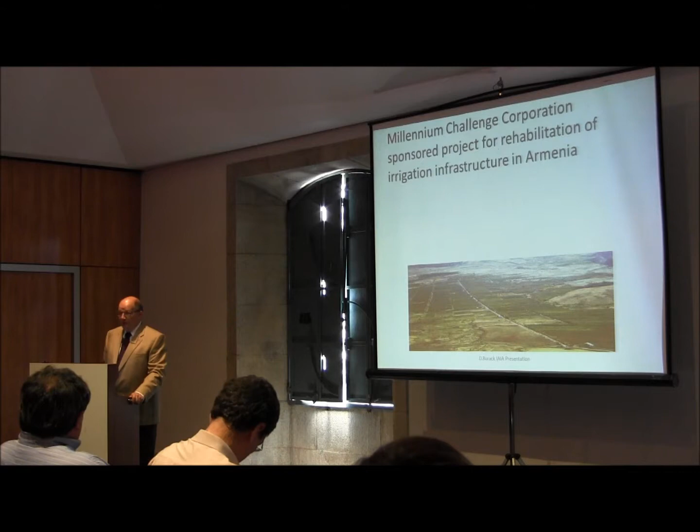It was the recipient of a grant from Millennium Challenge Corporation, a compact of 5 years, to rehabilitate Soviet-era irrigation infrastructure throughout the country. It was $177 million construction cost for the total project. I won't give you the statistics, but there were hundreds of kilometers of canals, main canals, tertiary canals, gravity systems, also rehabilitation of 17 pumping stations.

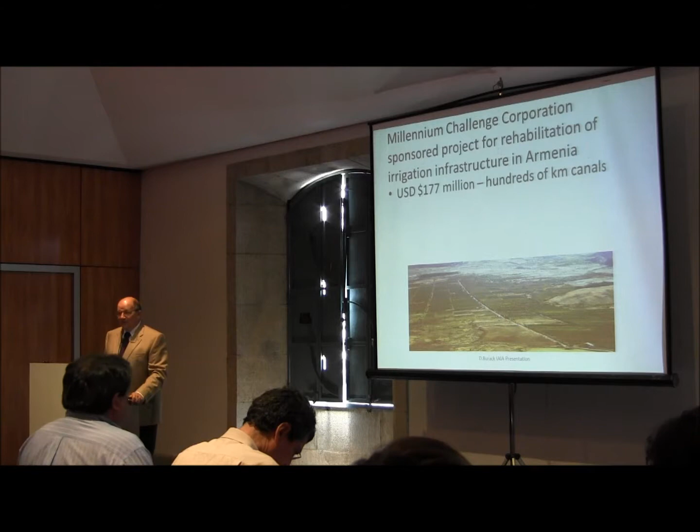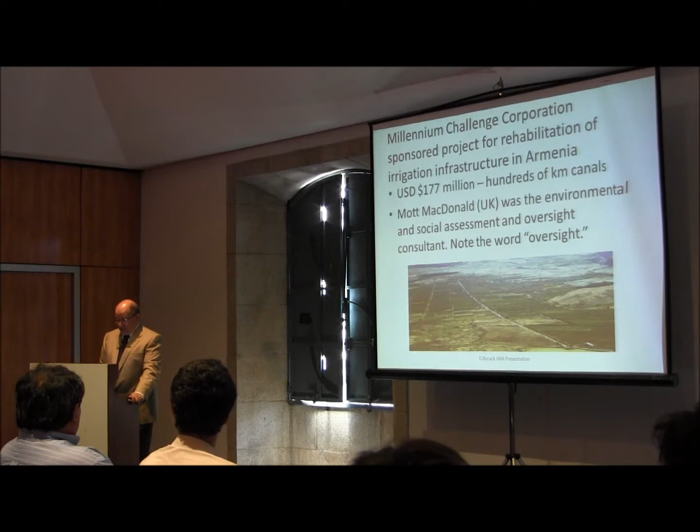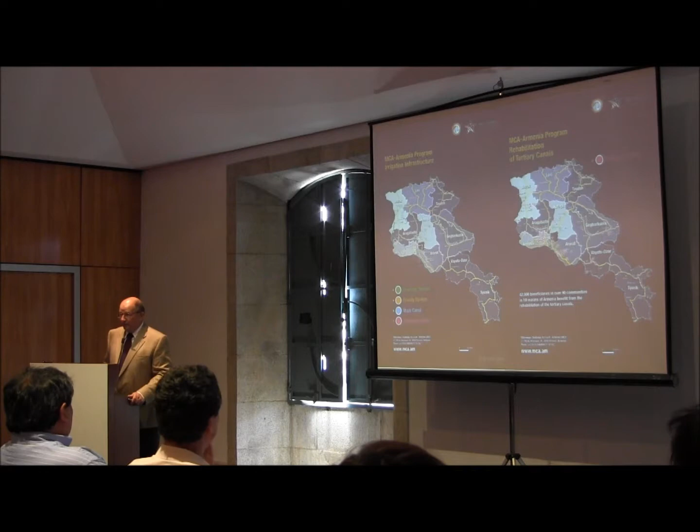I also won't go into all the detail on the systems, but you can see the little colored items show where the locations of one or another of many sub-projects, which was one of the challenges for the project.

And finally, this topic of compliance monitoring or oversight, as it's termed in this particular project. The project was conducted under MCC Millennium Challenge Corporation standards, which are adapted from World Bank and ADB and other international and multilateral development bank standards. This is, hope I can use your laser pointer here.

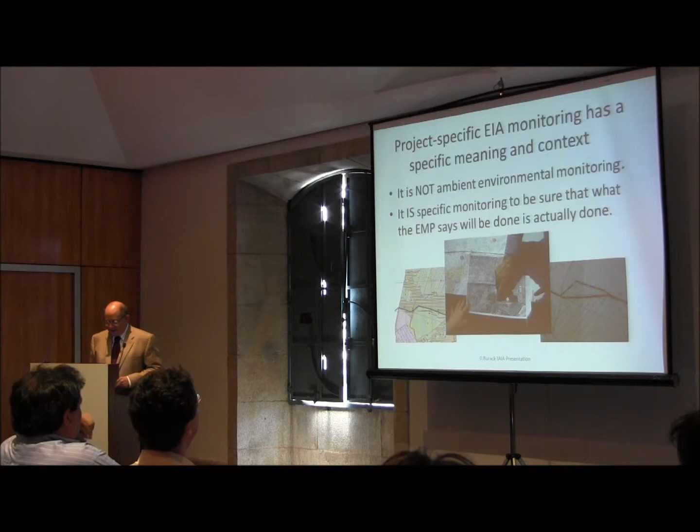Again, I already said this, that this is a specific context. It is specific monitoring to be sure that what the EMP says will be done is actually done.

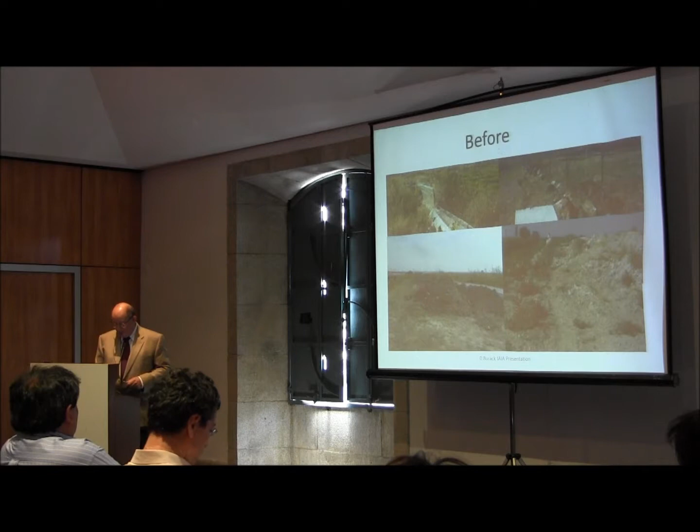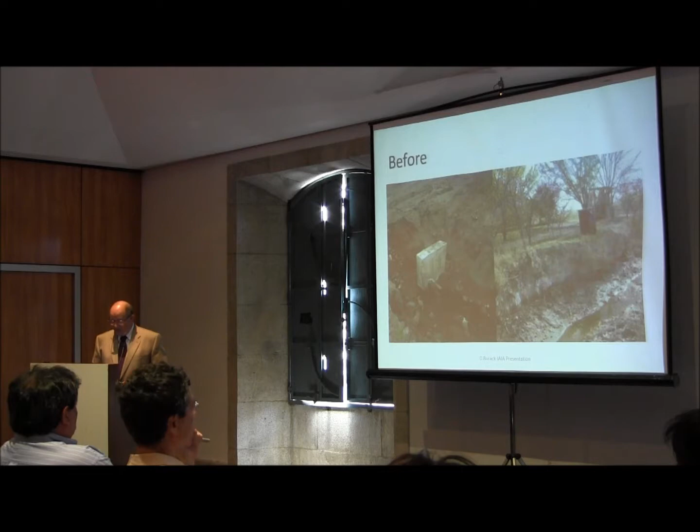Okay, in Armenia we had all kinds of problems. This is a before picture. The canals were left in terrible condition either before or after being rehabilitated. Erosion, of course, was a common problem, and every time something was built in the early years, it had to be protected. But after, as we got more experience and we got used to the environmental people coming out, as we did frequently, performance improved, the areas got cleaner, the landscape is impacted as minimally as possible, and actually in some cases it's an enhanced environment that was left behind.

So the basic story is that monitoring can be done, EIA can be implemented. Here are a couple other slides. We did other things besides monitor construction impacts.

We monitored drainage, water quality, both before and after construction, because there was a possibility that buried toxic materials might be brought up during construction, and toxic waste discharged to receiving waters, including international boundary waters that happen to be between Armenia and other countries.

This came up in the middle of the project. It wasn't anticipated in the beginning, but we had a very serious accident, a fatal accident, and another serious accident because the contractors were under pressure. They did not have adequate health and safety training or equipment. And over the course of the 2 or 3 years of implementation, that situation did improve.

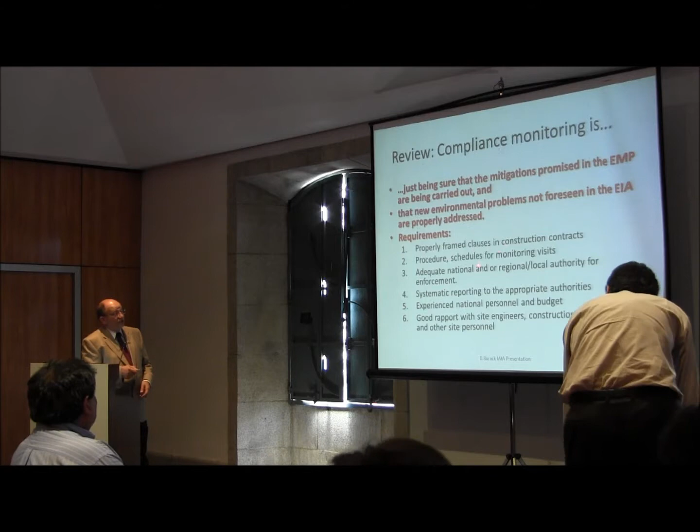So just in review, compliance monitoring is, as I've shown here, I wanted to repeat one or two points. First of all, schedules for monitoring. I've heard elsewhere in this session, in these sessions here at IAIA, that monitoring is being carried out, but I have to say that in some cases it's not being carried out frequently.

Does that mean I have 5 minutes left? That seems like infinity to me, but I'll be done before that.

And systematic reporting is very important.

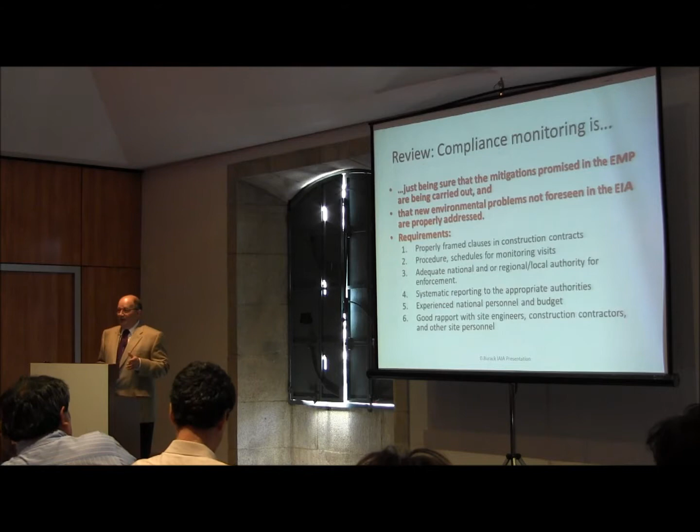Schedules for monitoring is a continuous process, and that's why I said it's expensive. You can't do it every 6 months and expect compliance, because when the cat is away, the mice will play, and lots of things come undone that you thought were all sewed up nice and tight. When you turn your back, whether you're the donor, the contractor, or consultant, all kinds of standards loosen.

Time schedules are very hard, getting worse for the constructors, and they're under all sorts of pressure to cut corners. So it's a thing that has to be done. Therefore, the schedule and reporting systems are very important to make sure you have those in place so that people are aware that you're coming.

We had a combination of scheduled and unscheduled site visits. We let them know, yes, we're coming in a week, and of course we expected everything to be in good shape when we got there. But they also knew there'd be times when we would show up unannounced, and we found problems and we worked them out.

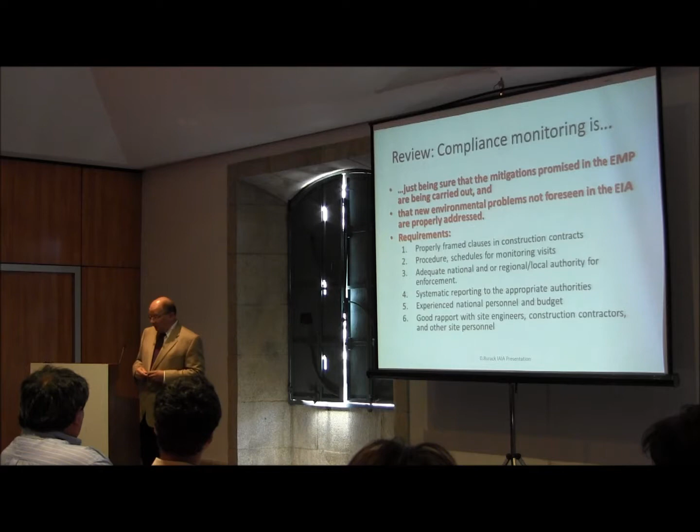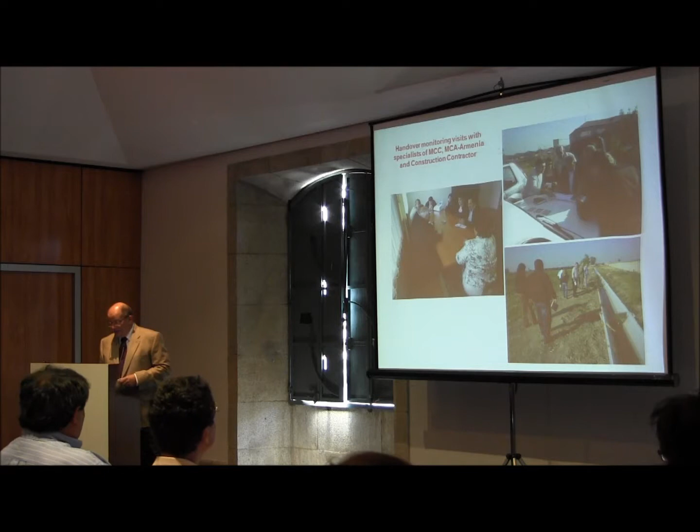These are pictures of some of the kinds of meetings that were necessary. There are indoor meetings with contractors, between the specialists from Millennium Challenge Corporation, from Millennium Challenge Account Armenia, and the construction contractor. You can see the meetings outdoors looking at the plans. And I was lucky, I had a great team to do this work.

I think future sessions with IAIA ought to look at the human resources aspects of conducting environmental assessments, from the point of view of the personnel working on the EIA. Let's face it, this is a large project. I've worked solo on projects too. The individual and the client, the person you're doing the work for, we should be aware that's a big factor in success.

Our people who did the monitoring had done the EIA. This was 4 years of activity. They did the EIA mostly for the first 2 years, and the EMP, and then the last 2 years were construction period, and the same people who did the EIA and EMP were involved in the monitoring. So they were intimately familiar with the entire operation.

This is our environmental team over on the right, that's us underneath the letters. Over here is the client, the distinguished-looking gentleman, and the woman to his right, our client, and here are the unhappy contractors.

Thank you. Yeah, it's an evolving process, and everybody's going to have different experiences ranging from 0 to 100 on either side of the scale, plus 100, minus 100, until this all evolves the way the other components in EIA have evolved. Thank you very much.

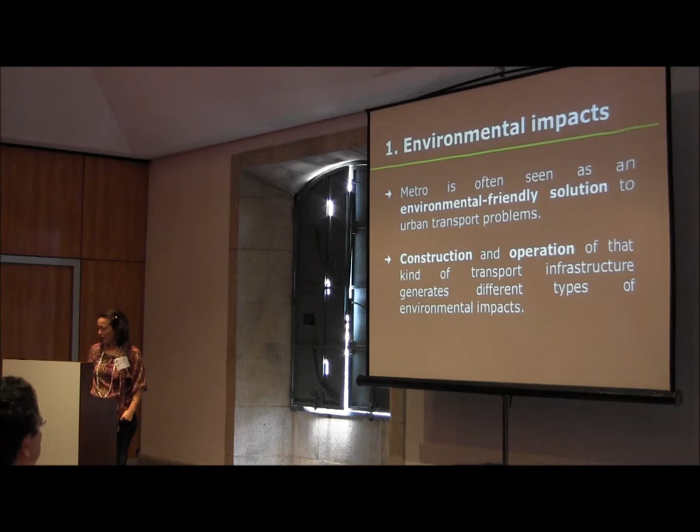Metro is often seen as an environmentally friendly solution to urban transport problems. However, construction and operation of that kind of transport infrastructure generates different types of environmental impacts. In construction we have the most significant direct and negative environmental impacts rather than in operation, but also temporary impacts. That's a time to make a parallel with the Asterix cartoon, with the works at Via Romana that started years ago and lasted hundreds of years.

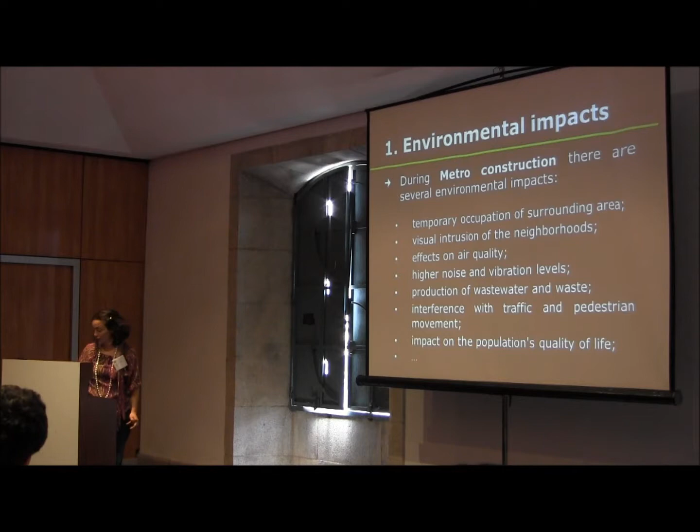When we talk about temporary impacts, for those who live there, they are temporary, but they last. So during metro construction, there are several environmental impacts. We are working in an urban area — there's temporary occupation of the surrounding area, visual intrusion on neighborhoods, effects on air quality, high noise and vibration levels, production of wastewater and waste, interference with traffic and pedestrian movement, and impact on the population's quality of life, among others. So what can we do to prevent this kind of problem?

In Metro of Lisbon, we implemented environmental procedures. In the last 10 years we've been gradually implementing environmental procedures, like at project stage. For each new project, environmental impact studies were performed, and when legally required, an environmental impact assessment was carried out. At the construction stage, environmental follow-up of new projects was implemented to ensure that measures to minimize impacts and environmental monitoring required by environmental impact assessment statements were taken.

Environmental requirements were drawn up and included in bills of works of Lisbon Metro projects and contracts. It was demanded for each one: environmental follow-up programs, environmental officers, and environmental follow-up reports, and at the end of each construction.

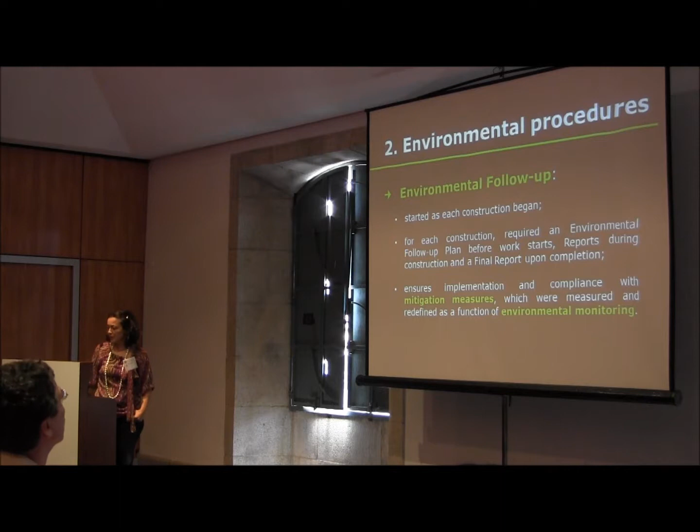For each case, we require an environmental follow-up plan before work starts, reports, and a final report. Environmental follow-up ensures implementation and compliance with mitigation measures, which were measured and redefined as a function of environmental monitoring.

Well, after that, I will show photos, because pictures are worth more than words.

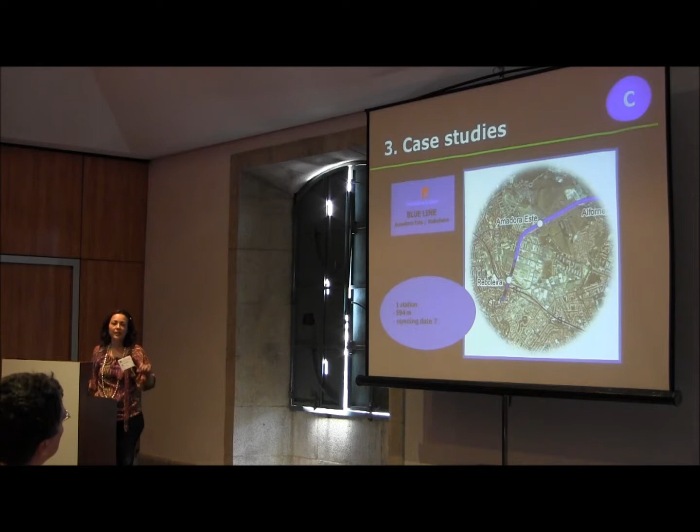The third case is the blue line — a small project with almost 600 meters. No one knows the opening date, because in Portugal we are in the middle of an economic crisis, and there is no money to finish it.

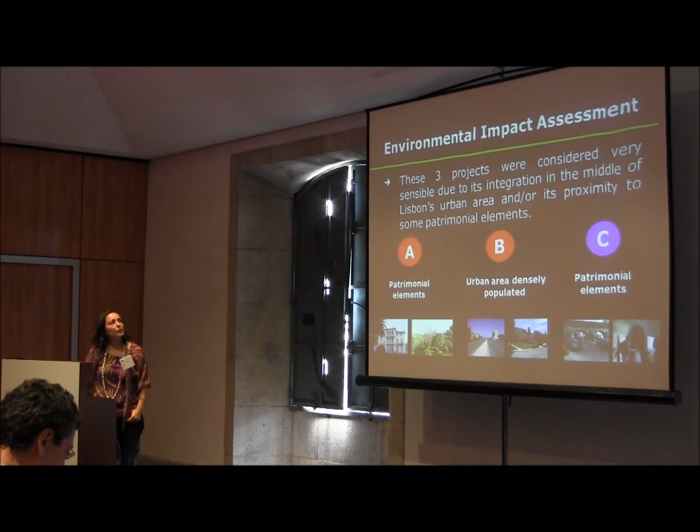These 3 projects were considered very sensitive due to their integration in the middle of Lisbon's urban area, or their proximity to some patrimonial elements. For the first case, we were nearby patrimonial elements; for the second, the reason for environmental impact assessment was because we were in a densely populated urban area; and for the third, we are near a national monument.

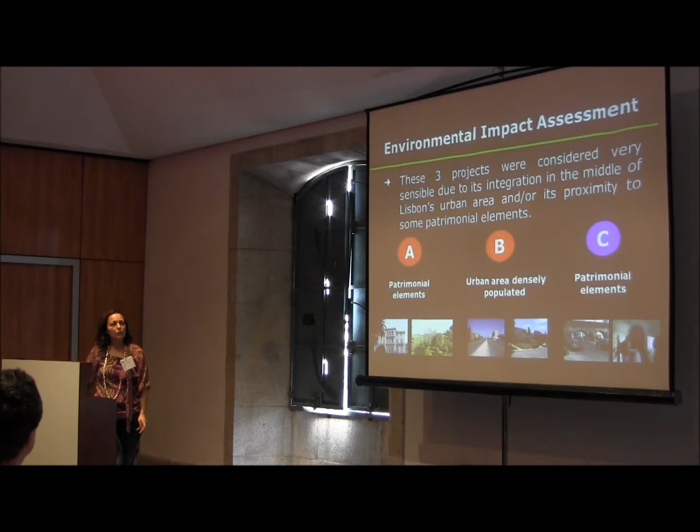I wish you to take attention to the A and B cases. They started with detailed design, and for those cases we took 6 months until project approval. We had public participation in all 3 cases.

In the third case, the environmental impact assessment started with preliminary studies, and it took almost 3 years for final project approval.

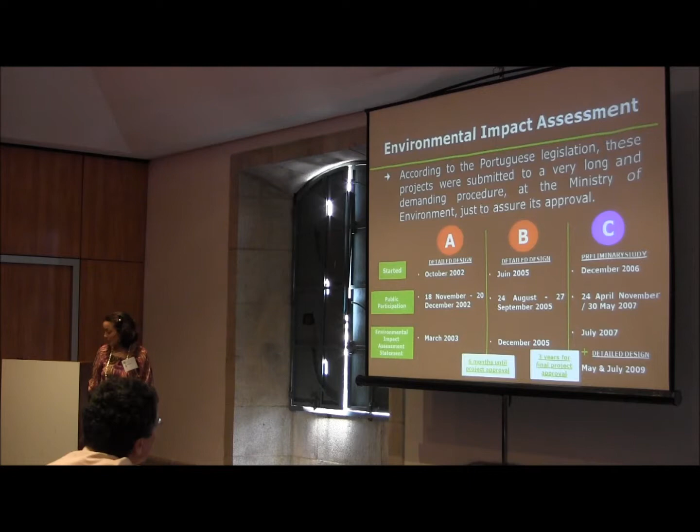In Portugal, we have these 2 options to make environmental impact assessment. Environmental impact assessment statements were required for the 3 cases. They demand new solutions on detailed designs, mitigation measures, environmental monitoring, and a report to the National Authority for Environmental Impact Assessment.

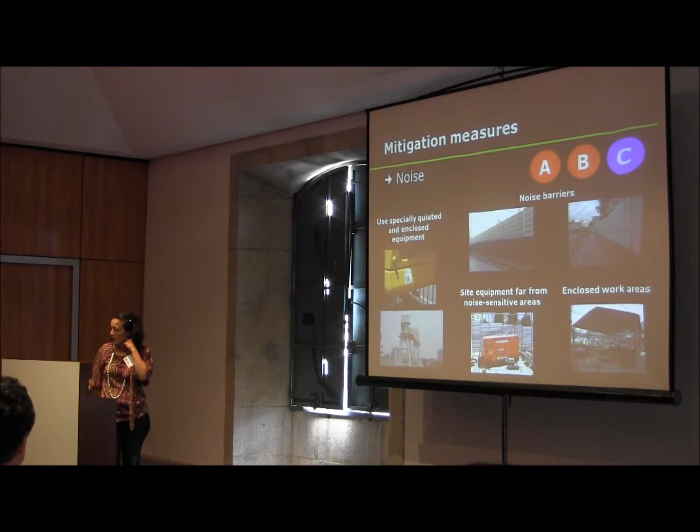Well, now I will show some photos of the kind of mitigation measures that we implemented. In terms of noise, we used specially quiet and enclosed equipment, noise barriers, site equipment placed far from noise-sensitive areas, enclosed work areas, among others.

In terms of vibration, we are working in subways, and in engineering this kind of work is very important. We select demolition and excavation methods not involving impact — that's a very difficult measure to take, not only with contractors but also with the people, the engineers.

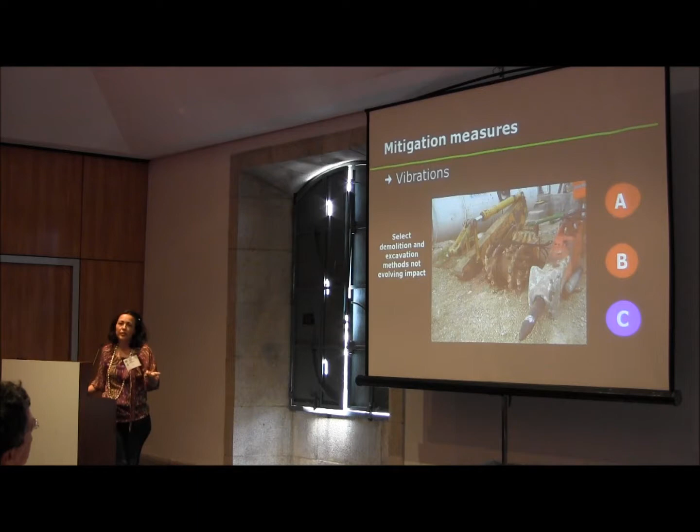For air quality, measures were taken such as washing, material coverage, wastewater treatment systems, and sedimentation tanks. 10 years ago we started our first experience with this in construction works.

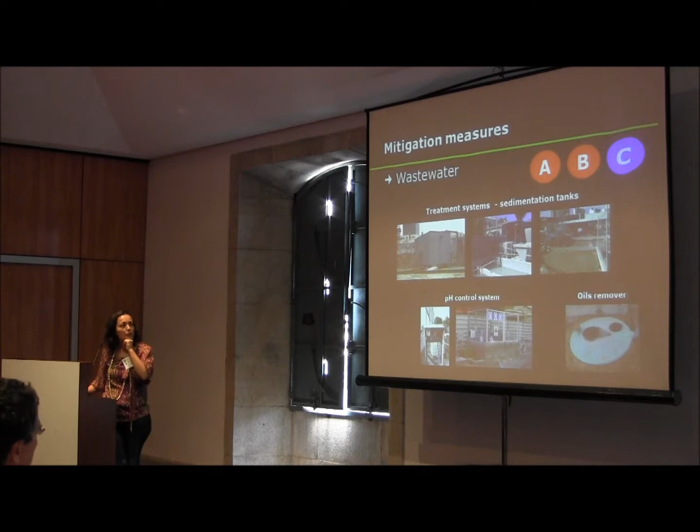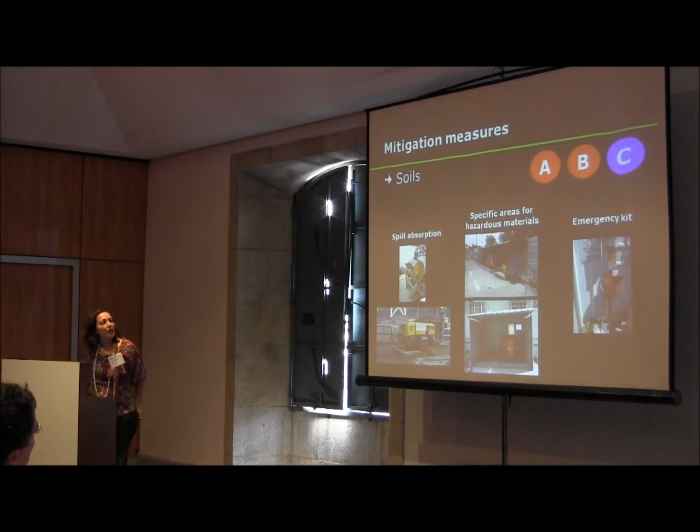We have a pH control system, which is a problem we have because of the concrete. We have to invent systems adapted to the construction field: oil removers, soil spill absorption sites on the works, specific areas for hazardous materials, and emergency kits.

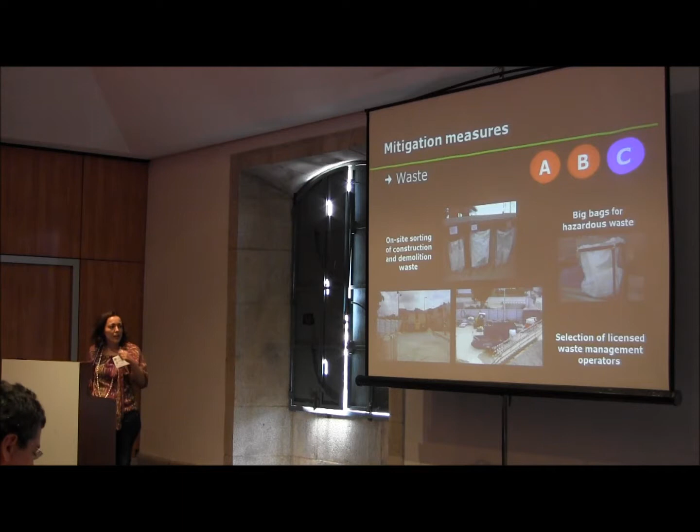In terms of waste, it's a constant in our works to have on-site sorting of construction and demolition waste, preparation for hazardous waste, and selection of licensed waste management operators.

Tree protection and transplanting trees are common mitigation measures. In terms of social aspects, we are working in the urban area, and people are our main concern. So it's common to have a public service officer, a newsletter for the population — that's a policy my enterprise maintains as a regular measure — and temporary urban signage is a constant.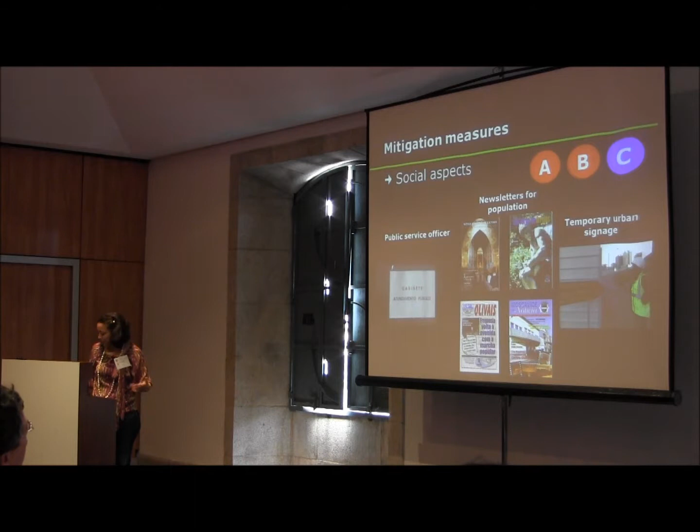In terms of environmental monitoring, in the 3 cases we monitor noise, vibration, air quality, wastewater, soils, built heritage, and archaeology. For the third case, the national authority considered that air quality was not relevant.

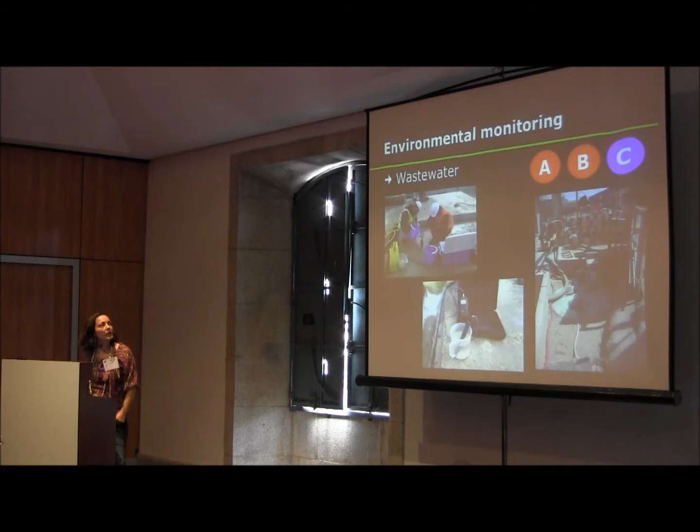There are some examples of the monitoring of noise, vibrations, air quality, wastewater, soils, built heritage. In terms of archaeology, initial archaeological assessment was made, and monitoring of non-archaeological excavation works was done. In the first case, there were no artifacts, but in the second one, we really found important artifacts.

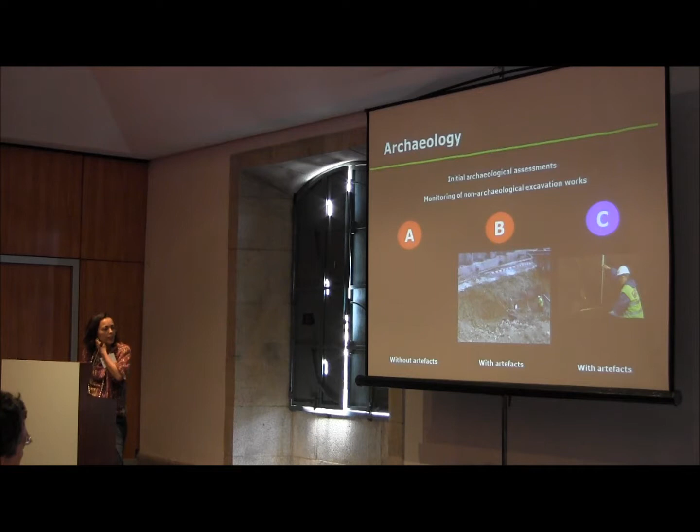In terms of residual impacts that remain after mitigation, there is a similarity between all 3 cases. Perhaps B is the worst and C is not so bad because it's a smaller project. Let's focus on B. For this type of urban project, we have human disturbance that is very difficult to prevent. We have noise and vibration problems that are very disturbing. Air quality in terms of particles and social aspects is very difficult to reduce. In terms of environmental aspects, wastewater has problems with pH, suspended solids and oils, and we have problems with soils and waste because we are making excavation in a big quantity. We have problems in terms of built heritage, and in some cases, problems with archaeology. In the 3rd case, it was a simple one.

Conclusions: with these 3 case studies, it was described the 10 years' experience on this kind of work. It was exemplified how environmental follow-up was a crucial tool. This experience has been extremely important and contributed to identifying the effective impacts on construction and looking for practical ways to solve or reduce them. It has been the result of great teamwork.

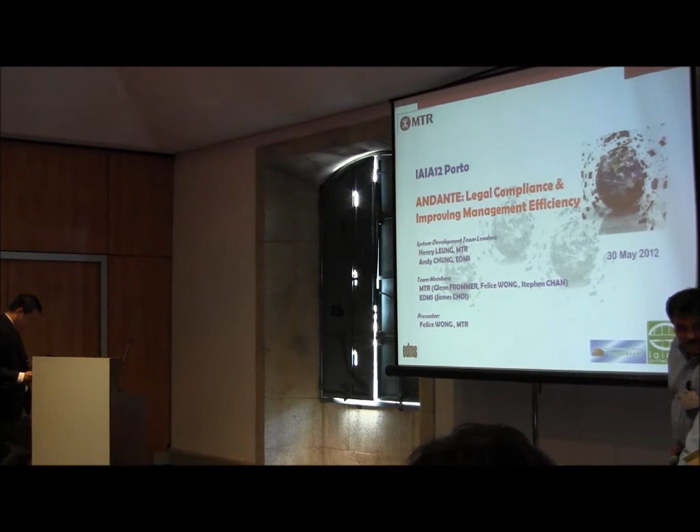My name is Henry Leung. We actually build railways. We are from MTR, building railway in Hong Kong. I very much agree with Juan saying that building railway in China or in Hong Kong, women might not be allowed to go into the tunnel because of a cultural belief that it would bring bad luck during construction works. So there was a small history on that. But anyway, sorry, back to my presentation.

Today's presentation is a follow-up session from what I presented last year in Mexico about the high-speed rail project that we are currently building in Hong Kong. Last year I explained a little bit on the EIA and the recommendations, on the mitigations and so on.

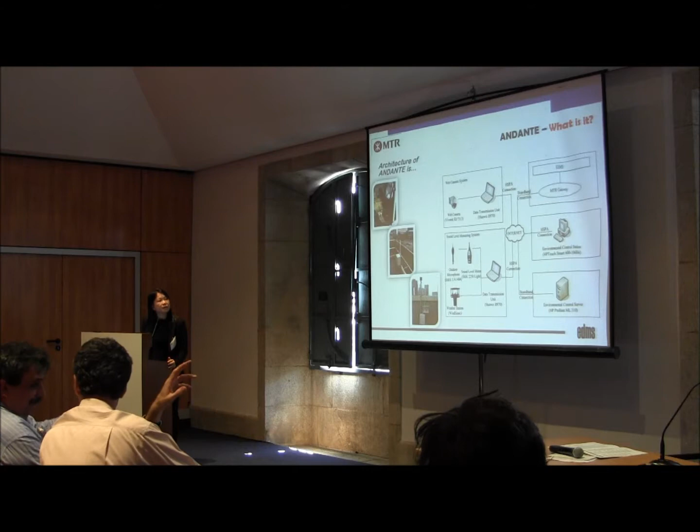Data are collected from all these devices and transmitted through a 3G data transmission unit. The data are then uploaded to the internet. We can then retrieve or download the data from the internet into the EMS - the electronic environmental management system developed by MTR - and the environmental control station, where we can view the data in real time. The data can also be properly stored in the environmental control server.

So why do we need to develop such a system? In Hong Kong, major projects like railway projects need to do an EIA and get approval from the authority. It is not only a requirement or recommendation of the EIA study that we do noise monitoring - it is also a requirement under the environmental permit.

So we have this system to do the noise monitoring, and we can better manage the contractor's noise control performance. Also, because we can get the data instantaneously, we can provide a quick response to any problems and rectify the situation as soon as possible.

Also, with this system for monitoring noise impact, we can verify the effectiveness of the noise mitigation measures we recommended at the EIA stage. This system also provides systematic procedures for monitoring.

So who needs this system? The project management team, who is overall in charge of this project, needs this. Henry and I, as the environmental team, also need this system to help us do the monitoring. Also, the construction team, the corporate relations team, and the project liaison team can get hold of the data quite quickly so they can provide a quick response to the public or any complainants.

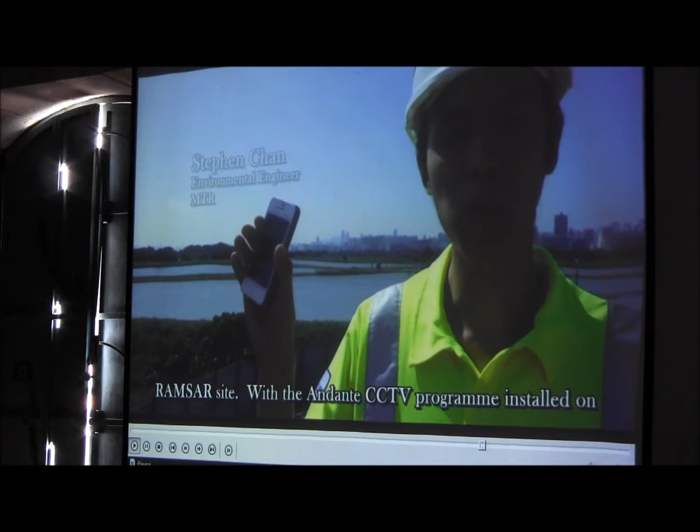The main works area is located just next to the ecologically sensitive RAMSAR site. With the Andante CCTV program installed on an iPhone, we are able to monitor the condition of this ecologically sensitive area anytime and everywhere.

Just running through a few more slides, time for a few minutes. I'm glad about the good responses. So I don't need to explain more about the function of it.

So to conclude about the system, with its implementation we are entering into a new way of running the EM&A program, in a more effective and efficient way, so that we can take results and respond to the complainant or stakeholders in a more responsive manner.

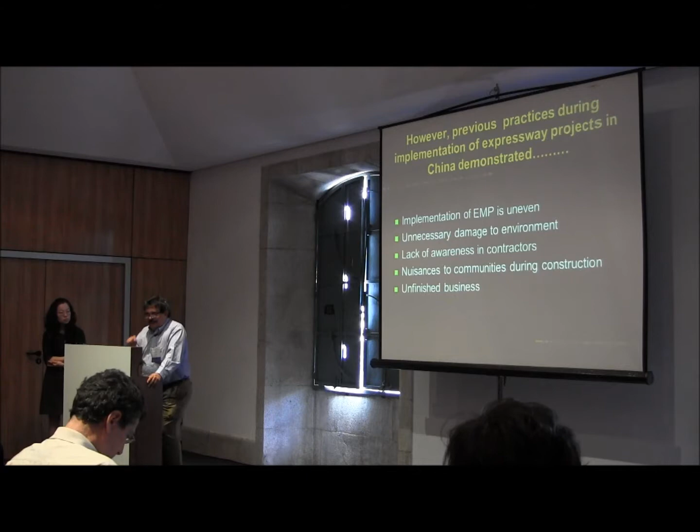However, in previous World Bank financed projects, the practice of construction, the environmental impacts of construction, and the implementation of environmental management plans were really lacking. We did a survey of many highway projects and found that EMP implementation was very uneven. It varied from project to project, and even within the same project, from contractor to contractor, with construction activity itself doing a lot of damage to the environment, especially water pollution and nuisances to communities.

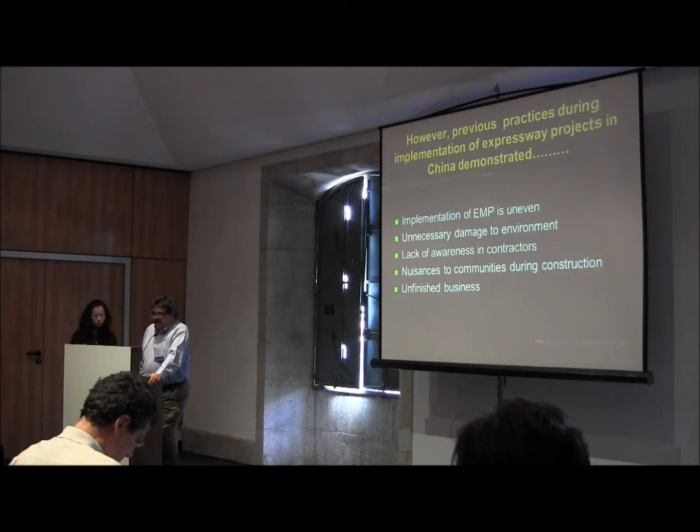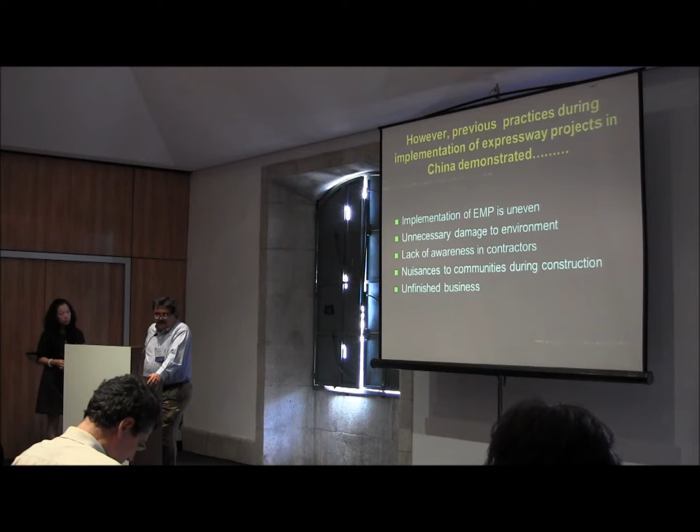We also found that contractors were not aware of environmental concerns, did not consider the environment important, the protection of streams, the control of noise, the control of dust, and a lot of unfinished business, leaving unfinished mitigation measures and leaving the site without restoration of affected areas.

Why did we do a very short analysis? Well, sometimes the EMPs were poorly designed, or very descriptive, very generic, or the EMP was not included in the bidding documents. And I like the first presentation, or they were not translated into contractual clauses for the contract - we never do that in most projects. Perhaps the most important reason for this lack of good environmental performance of contractors was the lack of an adequate enforcement framework in contracts.

The culture was that environment construction was always first, the scheduling first, don't worry, I will clean up, I will restore. There was no accountability and inadequate supervision during construction.

So now comes the female part of the presentation.

The Yiba Highway project is one of the last expressway projects financed by the World Bank, and I will let Faye make an introduction to the project.

I think all of you know where the Three Gorges dam is, and this project actually is located where the Three Gorges dam is located, and the entire...

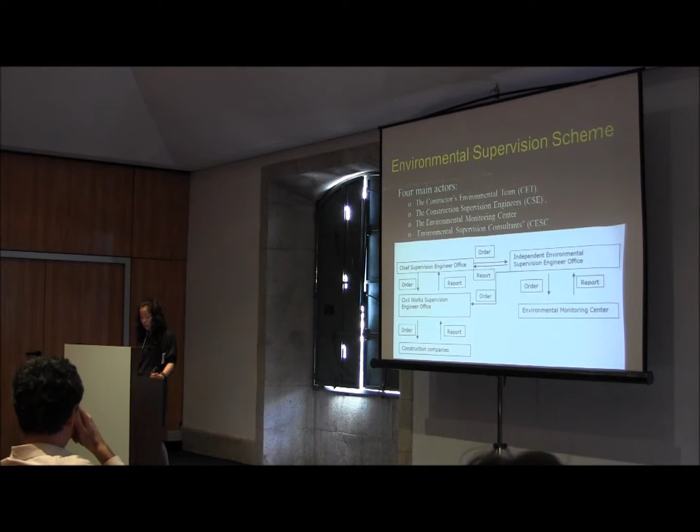Just to show you an example: for every invoice payment the contractor is getting, they have to get a verification or approval from the environmental supervision. Before the acceptance of the subgrade work or pavement work, they have to have the approval of the environmental supervision. So unless the environmental supervision signs off on anything, they will not get paid.

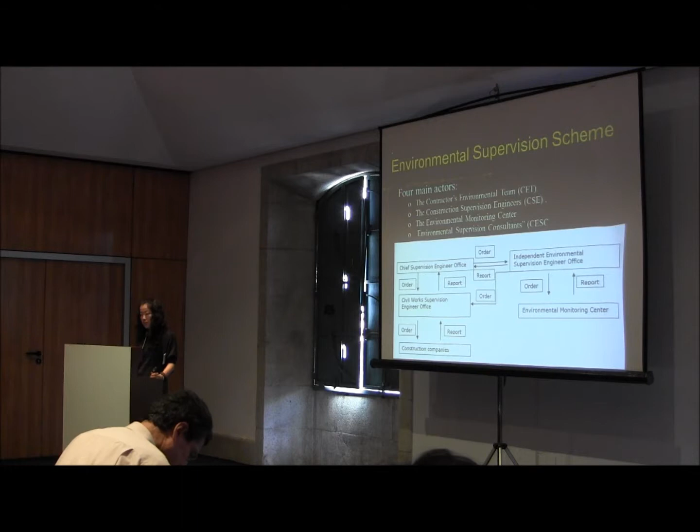So this really works as an economic incentive. We have under the compliance framework both a penalty and an incentive system.

How the system is working: it has a retention of 0.6% from the contractor's monthly invoices, and it also has 0.4% from the very nice owner, the project owner we have. They put in 0.4% of the matching fund for encouraging good performance. So these are the financial incentives and how it works.

Although the number doesn't seem to be huge, if you multiply by $2 billion, it's a lot of money. So the penalty system works like this.

If it's a minor infringement, the contractor will be given a period of time to remediate the problem and restore the environment. If it's restored satisfactorily within the time period, then everything would be fine. If not, we'll involve a third party to restore the environment, and the cost will be deducted from the offending contractor's payment.

So they will use that 0.6% of their invoice. And if it's a major infringement, meaning it's not reversible, then additional financial penalty in addition to that 0.6% of their monthly invoice would be taken out, plus the restoration activities.

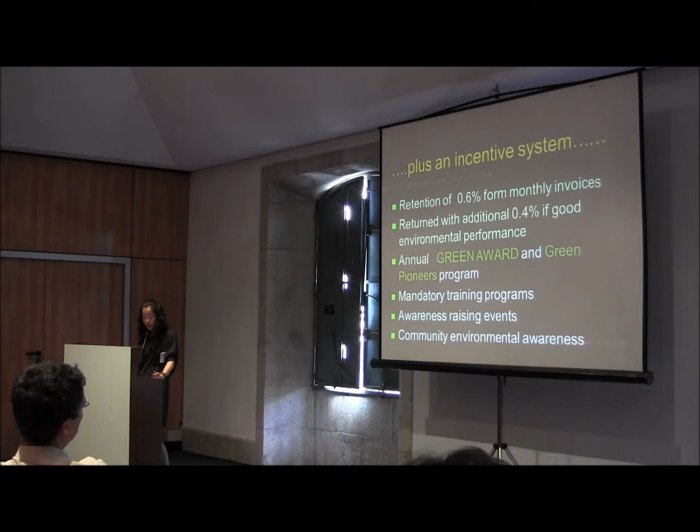We also have awareness raising and community environmental awareness. So now the question is, how is it working, whether it is working? So I'll introduce the impact that we have.

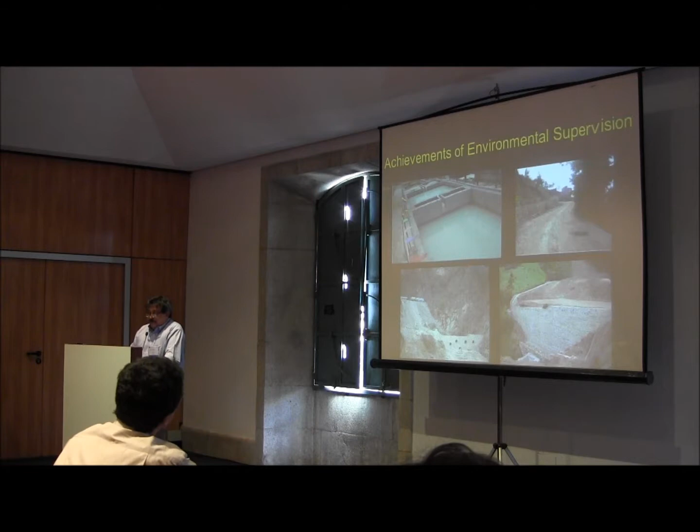I've been working in China for 7 years in highways and expressways, and the results cannot be more favorable. The situation regarding protection of streams, retention of sediments in casting yards, management of construction waste with good retaining walls and good disposal sites, good camps and good sanitation, separation and management of materials, control of pollution from tunnels and casting yards, management of stability along the roads, management of drilling fluids from piles near rivers, and slope protection along heavy and very unstable slopes.

I'm going to show you — we were there 2 weeks ago on a supervision mission — these pictures. I asked the supervisor to give me the most common infractions and how they were cleaned up. They were very self-evident.

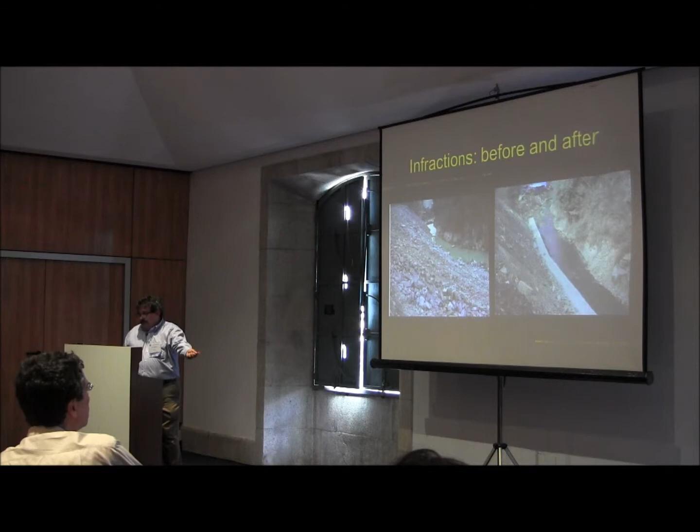You see the difference between the bad disposal site, and then the contractor will be given a period of time to build the retaining wall and do the cleanup. Also, retaining wall work. This thing about protecting streams looks easy, but this is the first time I see a systematic protection of streams in a highway construction project in China in 7 years.

We have obstructed streams, now we have open streams, or tunnel waste retained here without any retaining wall, here with retaining walls.

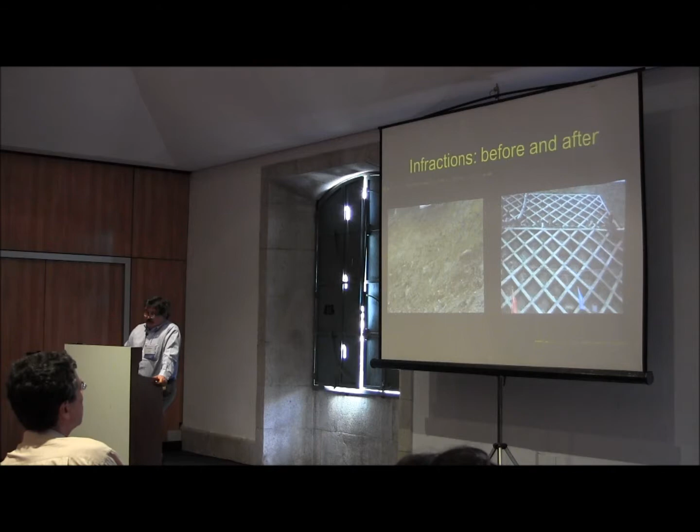Protection of cultivated fields — these are the most common infractions the supervisors find. Untimely protection of open slopes. This one's really a very nice one. Trash collection — see the difference. These are all infractions that have been managed through the compliance framework.

This is very nice — this is a pollution of the stream, and the presence of the supervisors really prevents it. It's a good way to prevent damage during construction. I asked the supervisor to give me their favorite pictures. This is a heavy construction site, and you can see that the supervision really ensured the protection of a good stream in this case and in this case.

They're very proud of having, even during construction, good protection of the slopes. The vegetation is already growing and the slopes are protected.

So what are the lessons learned? I think having an independent environmental team supervising a large infrastructure really raises the visibility of the environment. Before, the supervision environment was under the technical supervision, and they were overruled most of the time. Now they have the same power, they are visible.

Second, training of contractors, training of supervisors, training of owners' teams. This has probably been like 30% of the activities of the environmental supervision team.

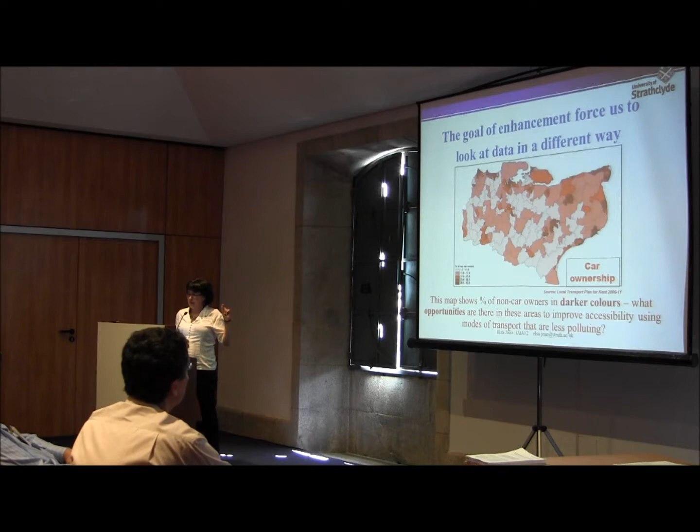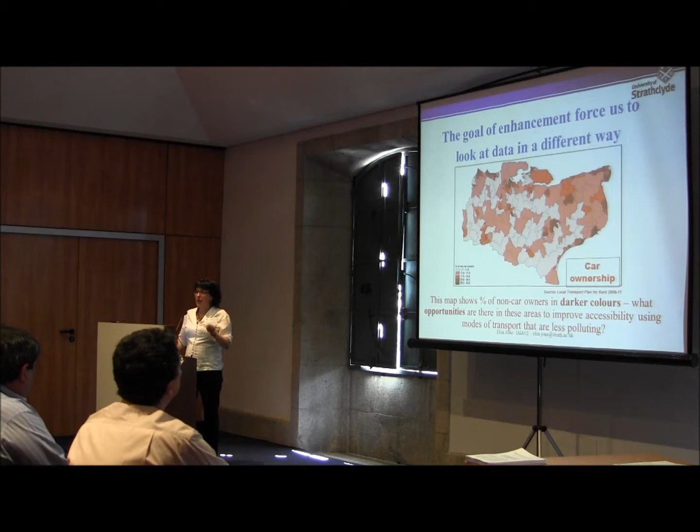But what's interesting here, in this map, is the darker colors actually show you less cars, because this map shows the percentage of non-car owners. What we're trying to show here is opportunities in areas to improve accessibility, using modes of transport that are less polluting. So instead of showing areas that have more cars and more air pollution, we're reversing the thing and thinking, let's show areas that have less cars, and here's where we have opportunities to do something different.

And I absolutely adore this map. I think it's fantastic because it's forcing you to think positively.

The other key challenge, which is the title of the talk, is this idea of do we need a new approach to baseline? Because we say, okay, what's your baseline? What do we have to protect? What's my little babies I have to protect? But is that what we need? If we're thinking of enhancement, it's not just what's there to protect, but what we might want to have there.

So it's not, we might need to collect data very differently. If we agree to this, we might need to collect not just what's there, but also what can be there and what we wish to be there. If we want to collect data on what we wish to be there, then we might need to require public participation before data collection, in order to determine the aspirations of the public to find out where we can enhance.

And this is a completely different approach to impact assessment. Just as an example here, this is my PhD student doing work on green infrastructure.

I'm not going into detail on this, but what's interesting on this map is that it shows existing broadleaf woodland habitats, which is the kind of thing we'd be collecting as a baseline study, but then very importantly it shows the opportunity. The slightly lighter green color shows where you don't have trees now, but you could. That's a slightly different way of collecting data, because obviously you cannot put trees on top of houses, and you cannot put trees if you don't have water, etc.

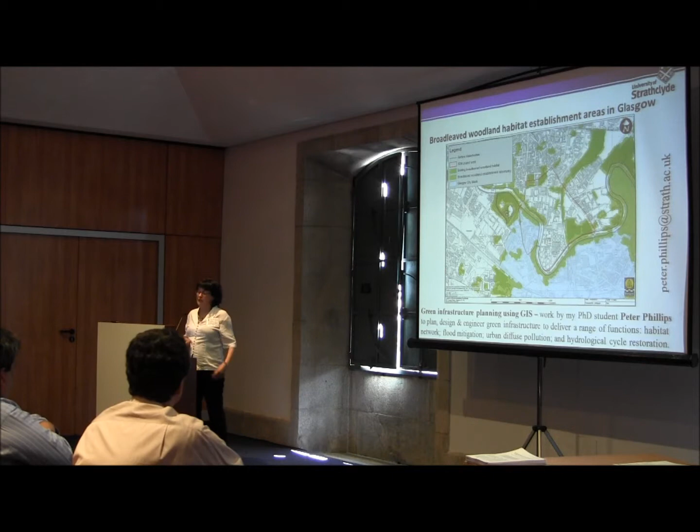Yeah, so you need to collect it slightly differently, using GIS to be able to do this. The other key challenge is how can enhancement be measured and monitored, including cumulative positive impacts?

And how do we know something is genuinely enhanced, and how does it affect follow-up? If we're really concerned about enhancement, then we should be doing monitoring and follow-up to check if this happened. But what about if it takes 30 years to happen? Like for example, health - we might be doing measures now, but we're only going to see the benefits in 30 years' time. So how are we going to do this?

And the final one is resources. Who pays? And can we afford what might be perceived as the icing on the cake? Although of course that doesn't cost much money, yeah, but still, it's a perception.

And I'm going to finish with a very final challenge, which is to do with how impact assessment actually works - how we do screening, how we do scoping. So we usually screen out, we think we don't require assessment of projects that are considered to be positive, and we scope out things that are considered to be positive, and therefore they're not significant. So actually, the way we do impact assessment means that we're actually scoping out the things that might be positive, and therefore we don't deal with it. So how can we actually work with enhancement if we eliminate all this data because it's not considered?

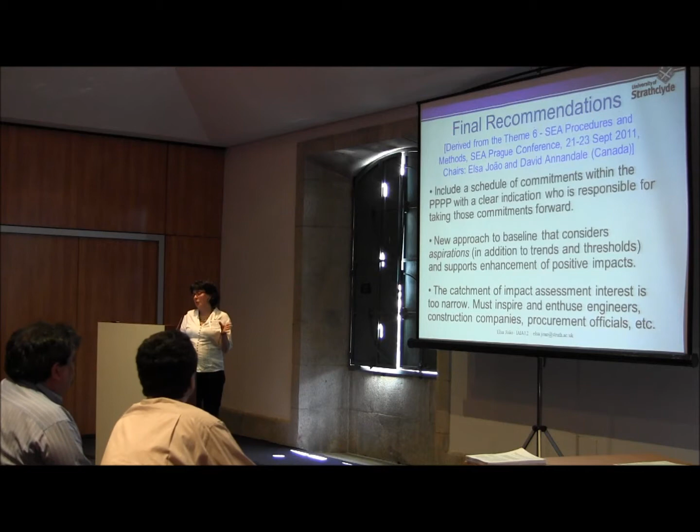So finally, I don't have a conclusion slide - instead of the blue slide, I have this slide instead of the original slide. This came out, there was a recommendation from SEA Prague for the theme that myself and David Annandale were conducting. I thought the three key recommendations presented in plenary tie into the kind of things that we've been discussing in this session.

So it's fundamental to include the schedule of commitments within the policy, plan, program, project, with a clear indication of who's responsible for taking those commitments forward. Exactly the kind of thing we've been discussing in this series of talks just now. And I would suggest that enhancement needs the same - if we're saying we want enhancement, then we need to get a commitment from it.

And very importantly - and again it's been talked about already in the session - the catchment of impact assessment interest is often too narrow, and we really must inspire and enthuse engineers, construction companies, procurement officials, etc. So it's not just them and us, but we're working together. And again, it has to find the enhancement - you cannot get enhancement without getting people enthused about these ideas. So that's my thought for the day.